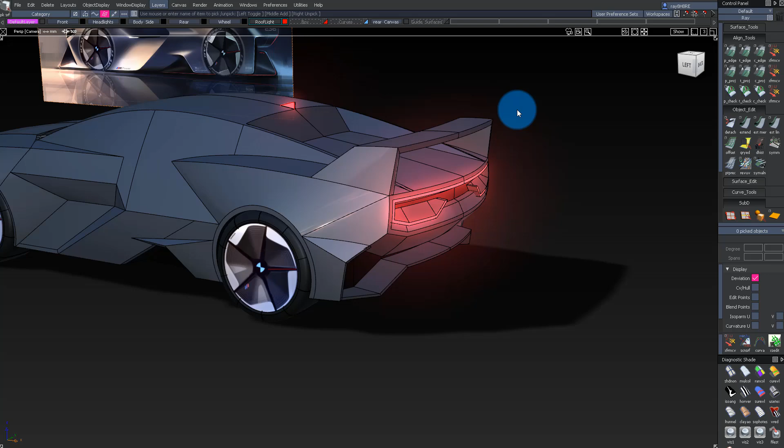Hello and welcome to part 4 where we surface in the rear. Before we get to that, I think this is a good time to step back and see this model on how it looks finally complete in this stage. This is just the first stage.

Now that we could look back on it, we could really start to analyze it and compare it to our sketches and see what went wrong and what went right, and overall if the proportions are good. This is a great time to send this off to Hanbin, and he could do some orthographics on top of that, which he already did. So let me quickly show you guys what he did.

Overall, we got really close. He really enjoyed these proportions, how thick the body is. The really big change, if you notice, is on the wheels. And all we're really doing is we're not making them bigger or anything, we're just moving them up about 30, 40 millimeters.

Obviously for a race car, to have extremely low ground clearance is super normal. So it's very easy, and it's still very believable if we just move all those wheel wells up, and it really balances out this car a lot better.

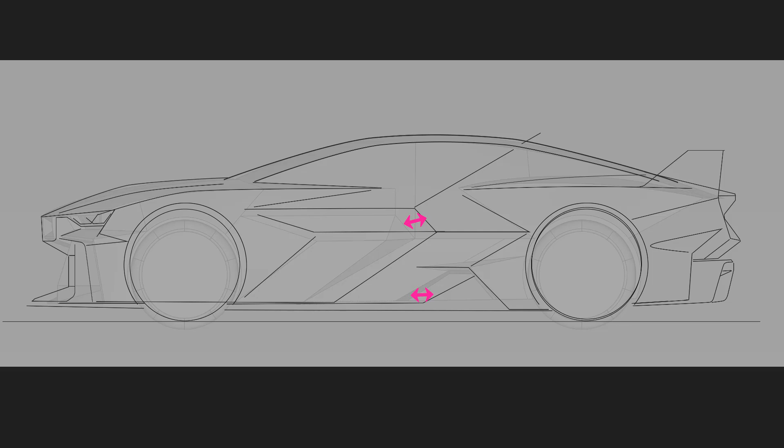And then if we look at all these lines, all of these are just like the curves that I already set up, and he's just refining the proportions. There's a lot of synergy here going on.

He had a certain side profile. This is a different one, but now it's within a package. He got my CAD, and now we could move forward. This is a very quick and great way to accomplish this.

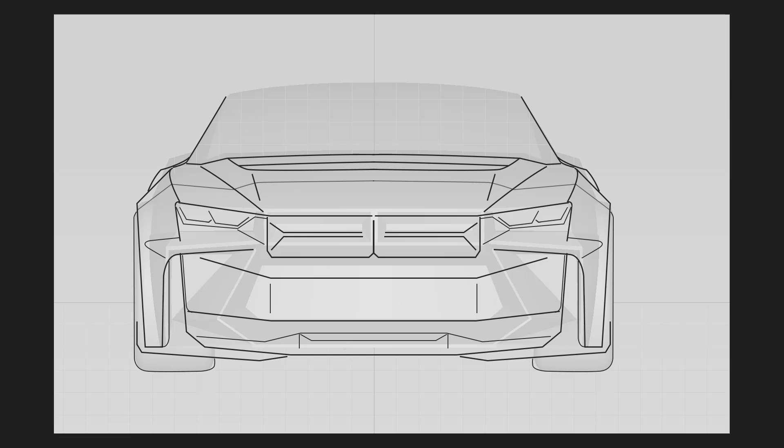And if we look at the front, it's still very good. He wants it a little bit wider, maybe a little more aggressive in the front, the grill a little bit taller, but nothing too crazy. And it's gonna be very easy for me to take my blocked in form and make it into what he wants. So let's remember that this is just the first step.

I actually consider this like the first real anchor. In the first video, I was talking about the anchors in a curve, and then later we talked about anchors as a surface, and now when we're talking about the grand scheme of things, this is like the first anchor. This is the first blocked in form that we can use as a base and really start to refine everything, and all of the relationships between the surfaces.

Proportionally speaking, they're not correct yet, but the relationships between them, like how if we can accomplish them, it's apparent, it's really easy. We could take this form and maybe mill it out, and maybe a clay sculptor can take it and further refine it. Obviously I'm going to refine it later in a more digital workflow.

But actually, I wanted to take this time to show you guys that this is really an extremely valuable skill set to have this blocked in form. Because if I send this to any other modeler, if they receive this and the sketch or the orthos that Hanbin gave me, it's very easy for them to sort of get to the next step.

There's a bigger proportion of CAD modelers who can do that, but to go from zero to this is much more rare. It's very easy, if you get this and someone's like, hey, put a fillet here, do this, refine this line, do whatever. But just having this form in space, that's its own skill set.

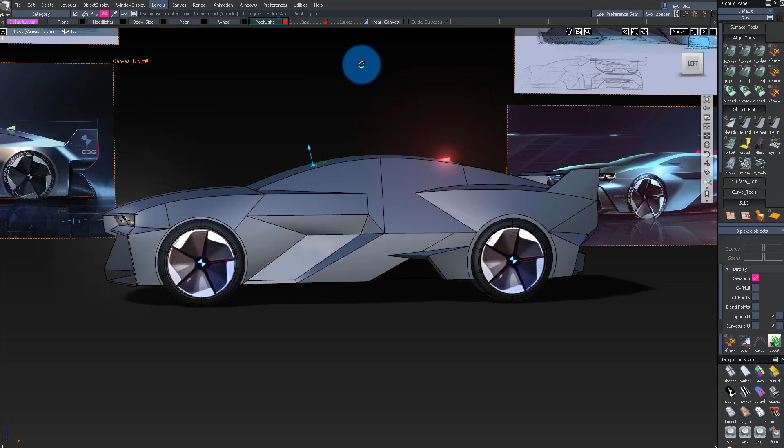All that is more of like the fillets and stuff, that's all technical stuff. But finding the form in space quickly is an extremely valuable skill set, and I always encourage people to practice it. Don't remodel stuff that you see on the road, because you're really just copying something. Try to find something that isn't in 3D yet, maybe some sketches you find online or your own design, and try to get to this point.

Try to practice that skill set, because it's extremely valuable. And also, let's remember, I've been doing this for a very long time, so it takes a very long time to get to this understanding of forms, or analyzing a sketch and being able to do this in a relatively short amount of time. If you do this in one day, they'll be extremely happy for you. But if you take a week, it'll be fine.

Before we do all the resurfacing, which will be the next video, we still gotta surface the rear. So yeah, I hope you guys enjoyed this video, and it's gonna be pretty basic, very much like the front. The side was the hard part, but the back is pretty easy. So let's get to it.

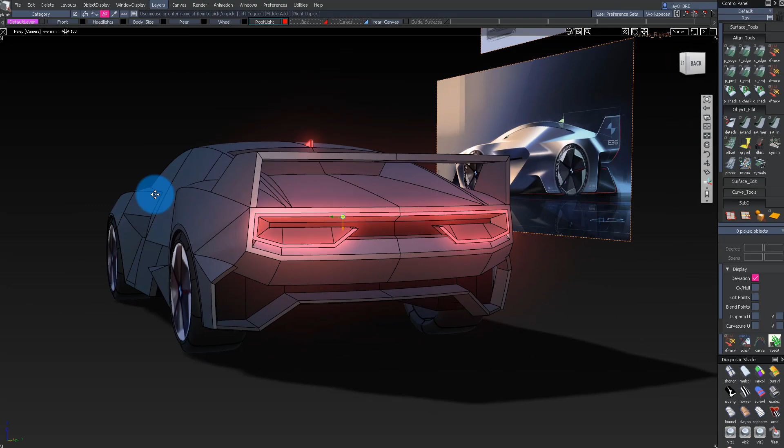Alright, so first we're going to surface this little rear fender. I'm going to grab all these curves in that surface, isolate them, and I want you guys to pay attention on how I use my surfacing tool to readjust my curve network, and the bottom of it, the side that's not connected to the surface, to make everything a lot smoother. I'm basically using the top surface to figure out how that bottom surface is supposed to be.

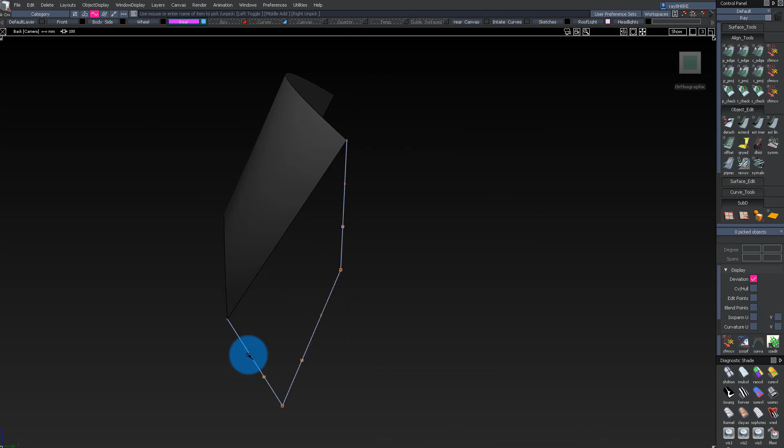Right now I don't know what it's gonna be, so in the beginning I just guess, because I know it's not gonna be flat, so I'm just gonna add a little bit of curvature. And then after that, I'm gonna use my square tool, which is hotkeyed to my number 4 in my preferences, and I'm gonna square up this side.

Then using that same tool, setting it up with curvature, I'm gonna let that tell me where the surface wants to naturally go. First I gotta go into my settings, and on that number 2 side, I gotta change that to curvature, and then on my collinear options, I'm gonna turn them off because I don't need them right now. This kind of shows me that the bottom of the surface is just too far out. You see how it's kind of bending in and then it goes straight? It should sort of naturally go further in.

So the first thing I'm gonna do is just make sure that all my curve network is set up with these new CVs, because the curves, I just made them wherever. But now that I know that's the right position to make that curvature, I'm just gonna snap it to that square. It's really kind of crazy because the curves I used to make it are getting adjusted by the result.

Here I got really close, but I just gotta get that curve and snap it, and then get that bottom CV and snap it. And now using this information, I could kind of tell right on that bottom left corner that it's too far out. So I'm gonna get my curve network and just put it in further inboard.

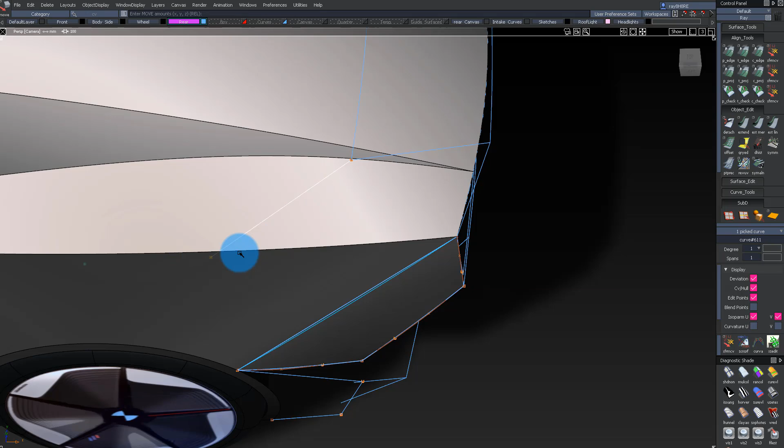I think it's important in this part of the stage to have more emphasis on letting the surfaces do what they naturally want to do versus doing exactly what a design wants to do. Because a lot of times what the surface or geometry wants isn't in line with what the designer is intending. But it's a lot easier to figure that out later when you already have everything blocked in how the geometry wants it blocked in.

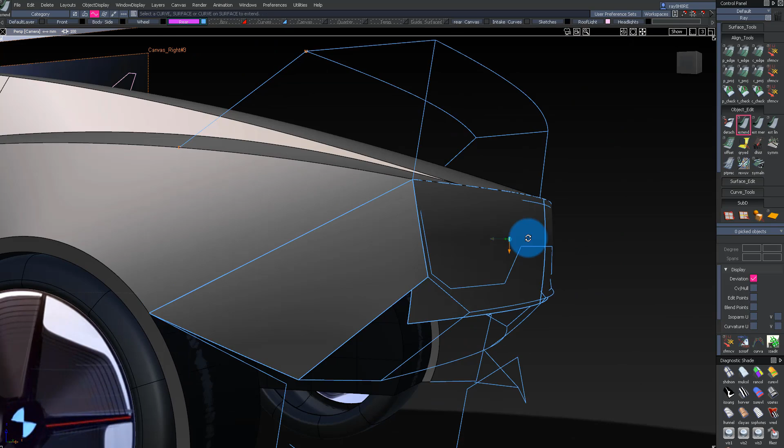For example, this rear surface that I just railed is a fairly simple surfacing condition. I railed it, and now I'm gonna extend this middle curve out to give it more space. And if you notice, that surface isn't really in line with the edge of it. Once I extend that out, we'll see the natural intersection.

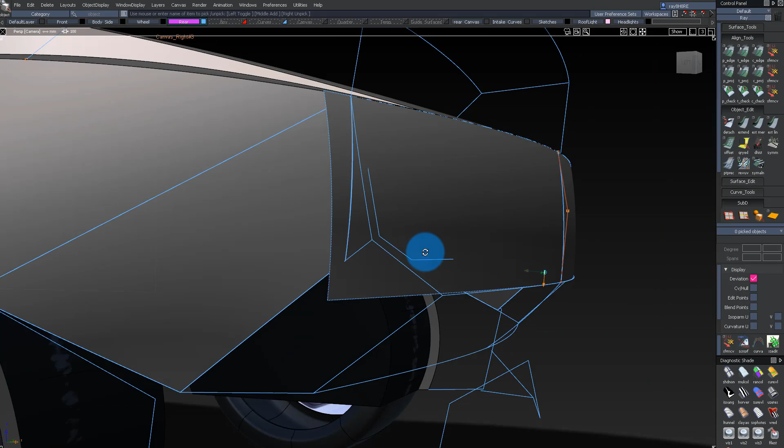Here's where you have to make a decision: should I have that surface twist out to meet this corner, or should I just do a natural intersection? Maybe it's not exactly what the designer wants, but that's the cleanest intersection I can get at this moment. That's the balance you have to figure out on your own—where should you twist stuff, or let the surfaces do what they naturally want to do.

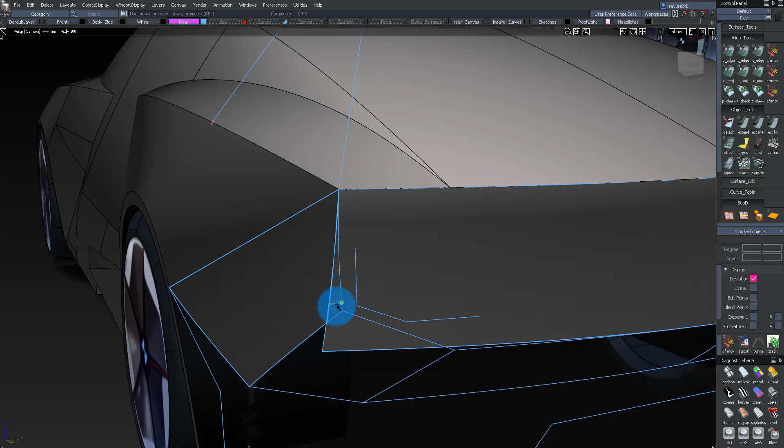If you saw that intersection, especially with the curve network, it does change the angle, and every angle is really important in all the designs. So it's really important to figure out if you're doing surfacing first and then design, or trying to get the design first.

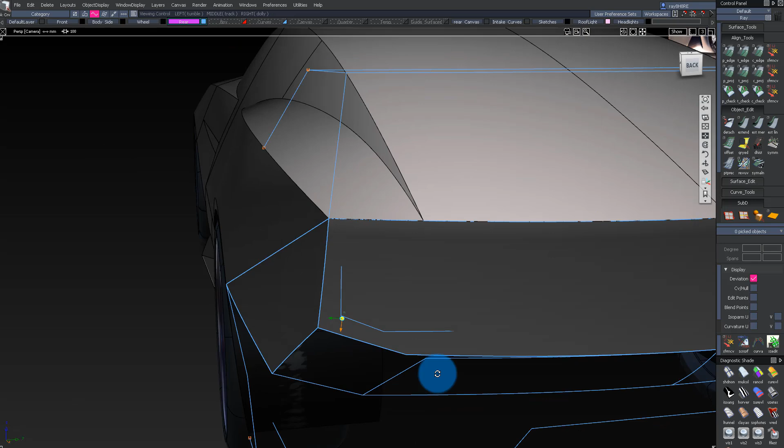In my own workflow, I always try to get the cleanest possible surface. Then after that, if they want something out here, we can twist it—we could do all the twisting later. But while I'm still blocking in this form, I'm just going to let the surfaces dictate their natural intersections and curvature, where they want to land. I hope I'm explaining what's going on in the back of my mind.

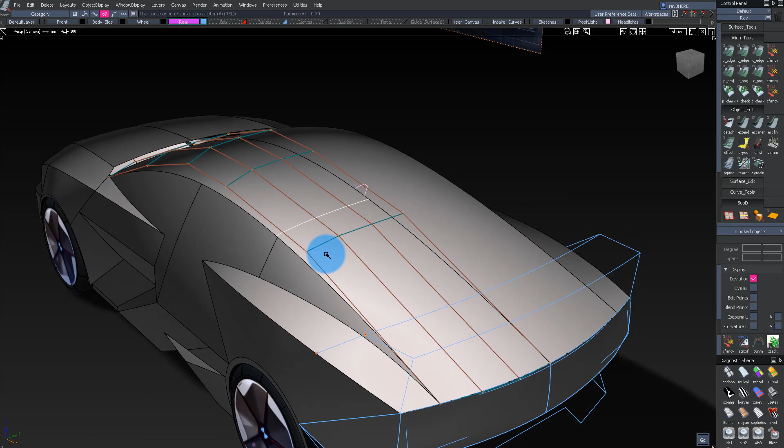So here I'm just going to start blocking in the rear window. If you see in the top left sketch, that window is cut in from the roof, and I'm doing the typical inserting the curve on surface to cut it where I want. Then I'm adding a curve and figuring out the distance, and I'm going to rail that across.

Now that I see it, I'm going to make sure it's parallel. It also has too much curvature in the bottom, so I'm going to add a curve there, project it, and trim-convert it to straighten out that bottom edge. Now that I see it with that window, I can see it's a little too big, especially when you see the sketch—it's a little tiny window in the rear.

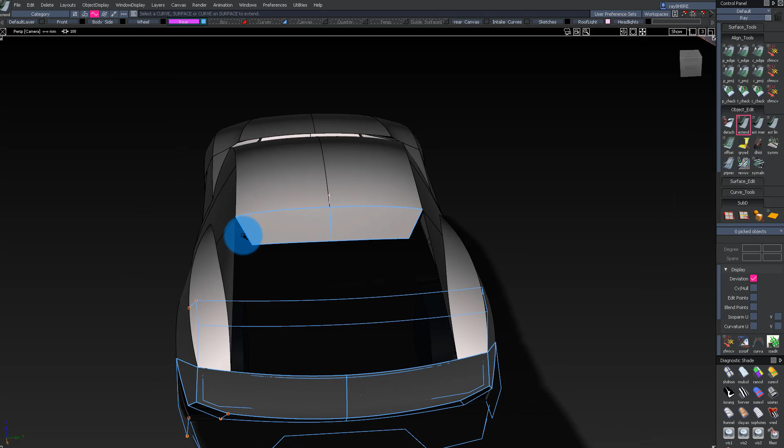From here, I could start adding little curve networks to see where it's at. And right here, I realized I should have cut it just a little further back to make my life a lot easier—now I've got to do everything over again.

Whenever you see places where moving things 10 millimeters can make your surface a lot more connected, it's really, to me, worth it to just rebuild it. That way that corner is completely connected to that other corner.

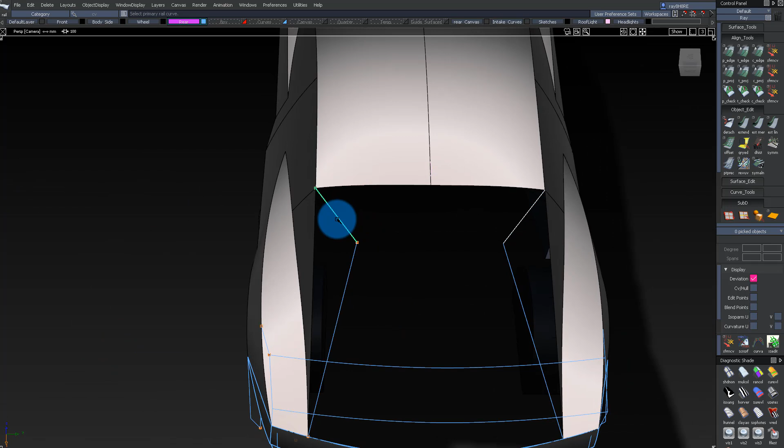Here I'm going to do the same thing, except now that I have that angle, I'm going to surface it backwards, then extend it back to the middle, and use my symmetry plane align to get that there. Then I'm going to rail this and extend it a bit back, project this curve, and there we get a little—I guess these are called louvers, I'm not sure.

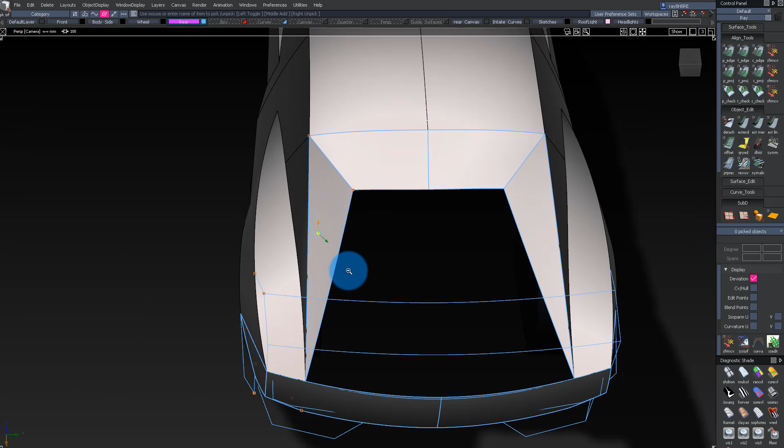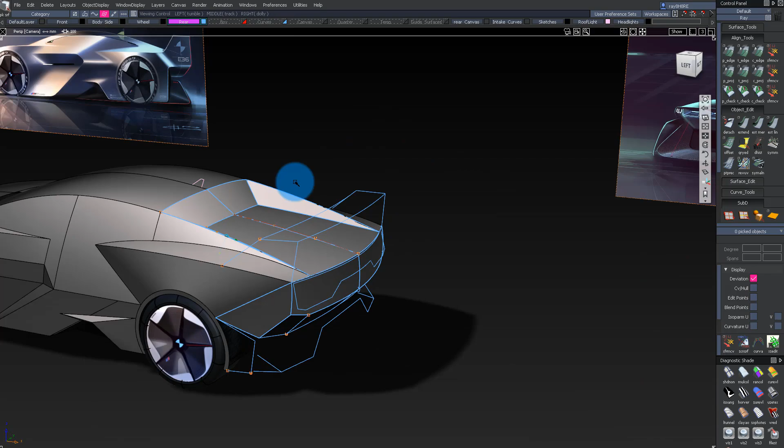Now to fill in this deck, I just add a curve, go to the side view, add a little more degrees, and then more curvature, and surface out that square. As you see here, my position failed—that's because it's a trimmed surface, it needs a little more data to get a perfect positional connection. But it doesn't matter too much when it's in this blocky form—we don't need to look for perfection just yet.

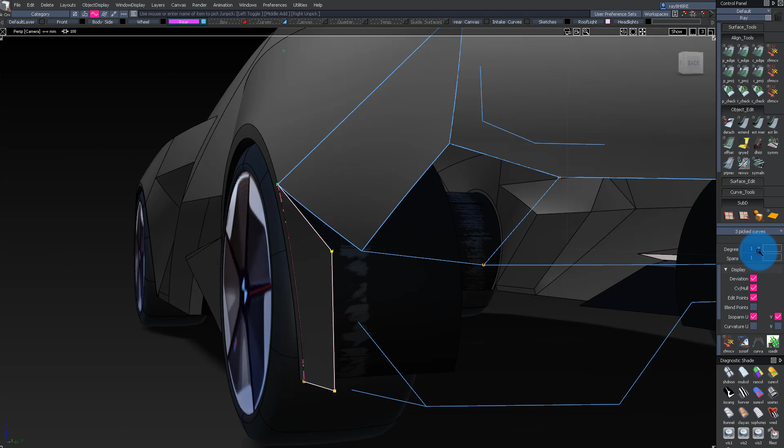In this corner, the bottom corner of the fender, I'm just going to surface this up like a regular little square. All those curves are still straight, completely straight. Let's remember, no curve will ever be completely straight—anytime you use a completely straight curve in the final form, it doesn't really work out. So I'm adding a little curvature, and that makes everything look a lot better.

And here I'm going to use a very similar technique to the front headlights. I'm using the tubular offset tool to make the edges. And as you remember last time I did the same, I'm moving these edges closer in so it doesn't mess with any of the sides. And then I could just trim it.

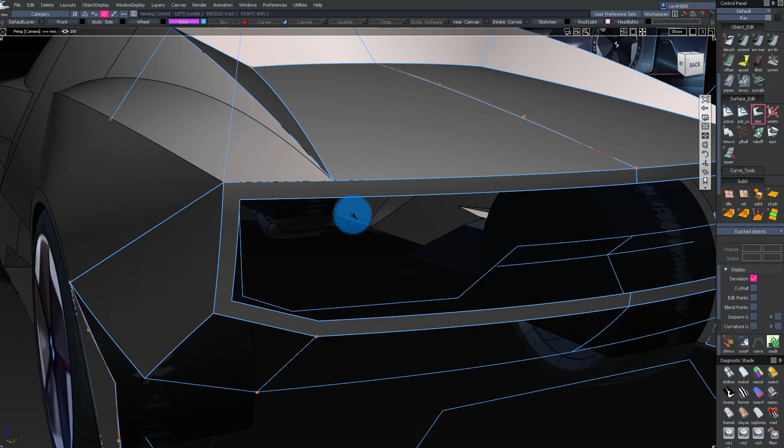Now I have a little sort of border around this rear. Here I'm just trying to figure out what can be my next move, what can I build off of this in terms of the internal structure. I'm looking, and then I see that bottom curve, and I'm like, okay, at least I know that that bottom curve is definitely going to go in like that, and I could use that to sort of go all around the form.

So I'm going to realign it to my new border, and then I'm going to use my rail tool to get it in place. Now, remember, I forgot how I used to clean them post, changing the degrees and stuff. But I'm trying a new method, using my rail tool as the final tool, instead of rebuilding it.

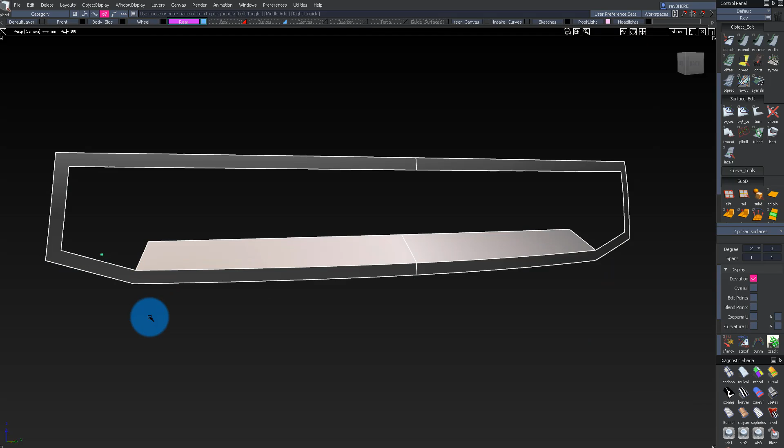So here you'll see it again with all those spans, and I go explicit control, and then I give it like a 3x3 sort of degree, keeping everything as clean as possible. Remember, all my surfaces will try to clean - the minimum amount of degrees you need is the right degrees, the minimum amount of spans is better. See all these spans? Let's get them out of there.

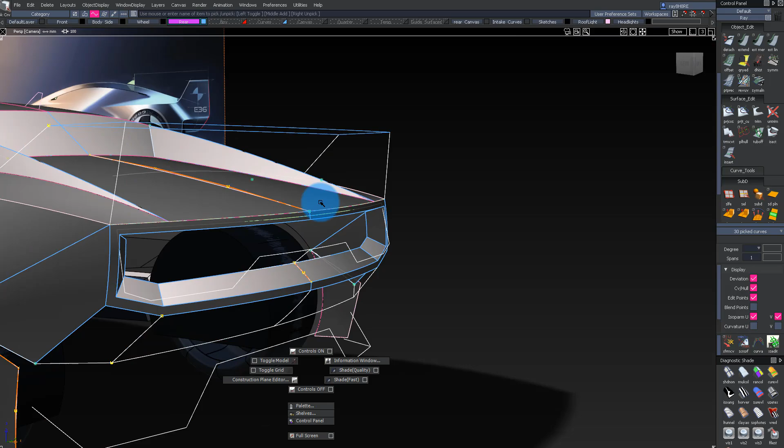And then I'm just doing the same thing, getting a little border around it. After this, I'm just looking for some quick easy wins, and I'm like, okay, I could just quickly surface in the bottom of these volumes. Just get those curves, rail them, and then make sure it's parallel - I always change it to parallel, I might as well make it my default.

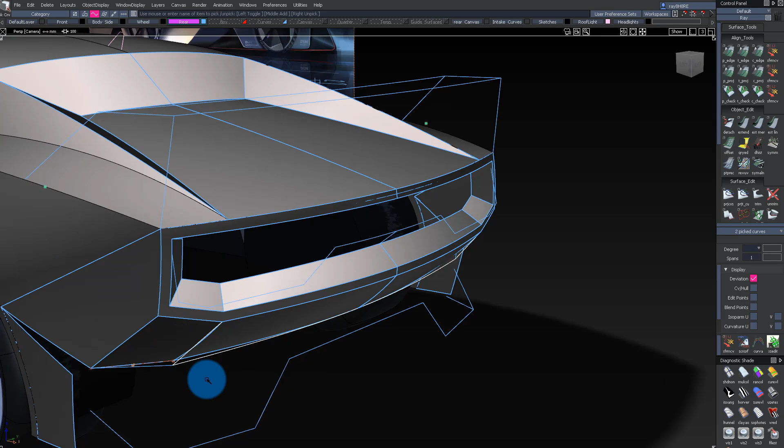Make sure there's curvature in the middle, extend it out, and then use those two as a way to connect them, and then just square it up. Add a little more degrees, add a little more volume, and then use my square tool to get that corner. When you compare this rear to the body side and the front, they're just really easy - if you keep it very blocky like this, it's pretty chill.

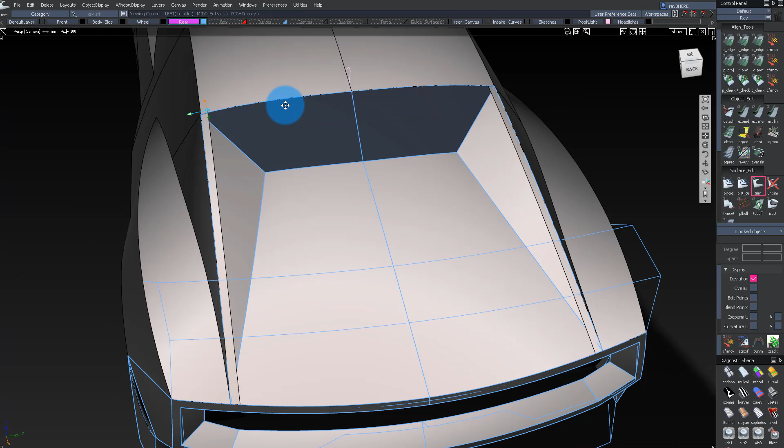And then here I'm analyzing that, and the surfaces are coming to a point, so I'm not really happy with that. So I'm actually going to rebuild it again. I'm going to add a little border here, and this way I have a little more meat right there. And now I have to readjust everything.

It's funny because I'm modeling the same rear, and both times I'm using a completely different method, kind of going from different sides. And then now, since I already have that surface, I'm going to intersect it and trim convert it, as opposed to making it like a square like I did last time.

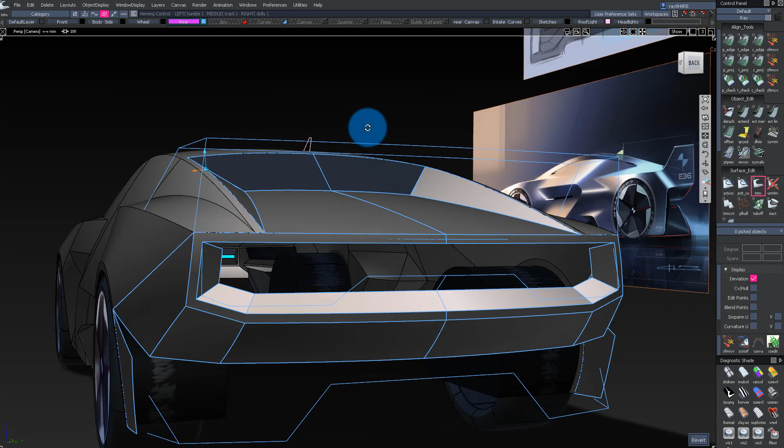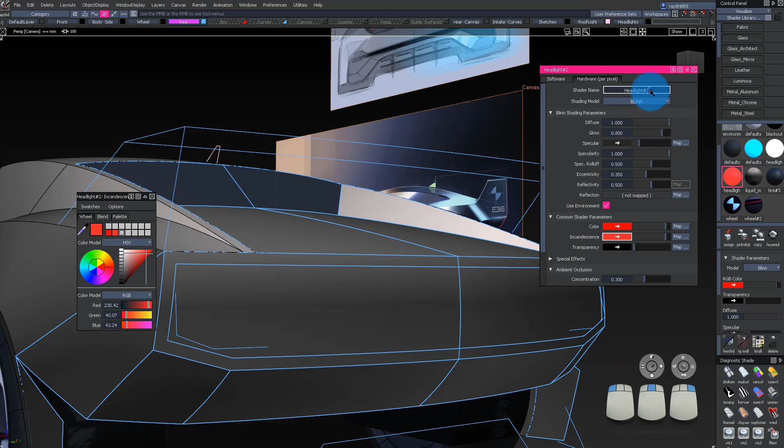And remember, I always keep everything really loose in the sense of how I model - it's not like this is my only method of modeling something, it's only the one that kind of came to my head. If you notice with that rear, I basically remodeled it about 3 different times in this video, which is always important - I always put a bigger emphasis on trying to maximize the speed of your steps.

So that everything you do is really quick, and this way you can do a very free form approach, kind of how I'm doing it. I don't really think much, I guess I don't think about where the tool is at - I just sort of press the button, kind of to test different modeling methods.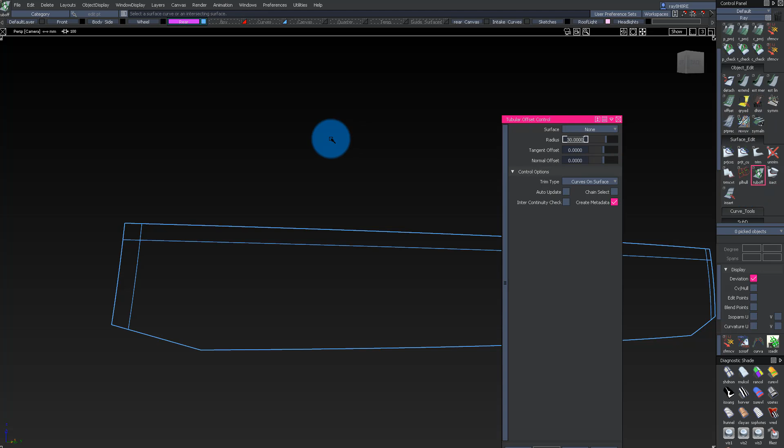And here I'm just doing the rear tail light very much like how I did the front headlight, using my tubular offset tool.

Let me post up the picture of the rear sketch so you can see what I'm trying to do with the rear. This is a good time to notice what I've done and what I'm trying to do, and how I just simplify everything. I'm not trying to solve all the design right now, just trying to get the most basic shape based off this design.

A lot of people, especially in the beginning, try so hard to find the final design right off the get-go. Just remember to block everything in as simple as possible, especially if you're not used to it. This is a very advanced lesson, but if you're starting slower with something like a mouse, just remember that it takes time to understand how to break down a design to its core foundation and build that. Then off that foundation, we add the more intricacies and design elements. There's no way you're able to do that right off the get-go.

I wouldn't be able to do that if I didn't go through this phase, and I wouldn't be able to find the next phase. So I'm just trying to emphasize that when you analyze a design, don't go with all the fancy stuff. Make it as primitive as possible, and once you have a full complete picture, then you can start adding the more intricate design elements or surfacing elements.

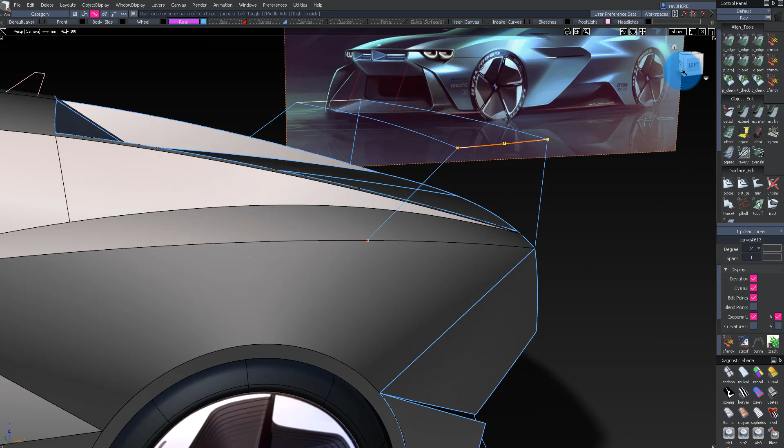The next part is how I made the wing. I kept it very simple because I definitely know that rear, especially proportionally speaking, the wing was really going to be changed a lot, and I just wasn't going to hit it on the first attempt. So I'm doing the most basic sort of surfacing with it, nothing too fancy, nothing too crazy. It's honestly almost just a couple planes, there's really not much to it.

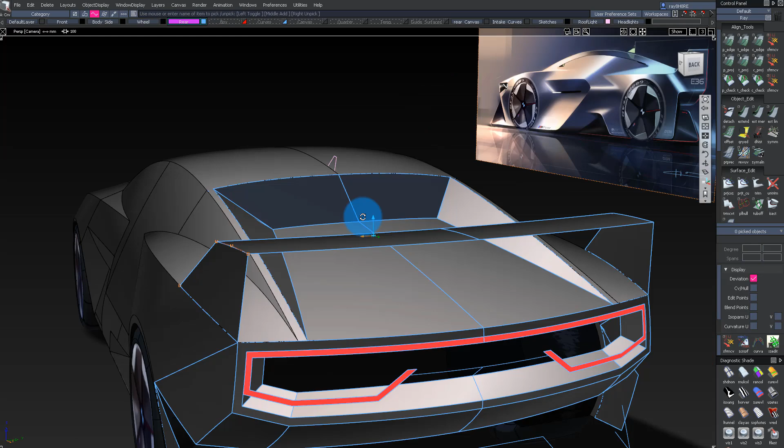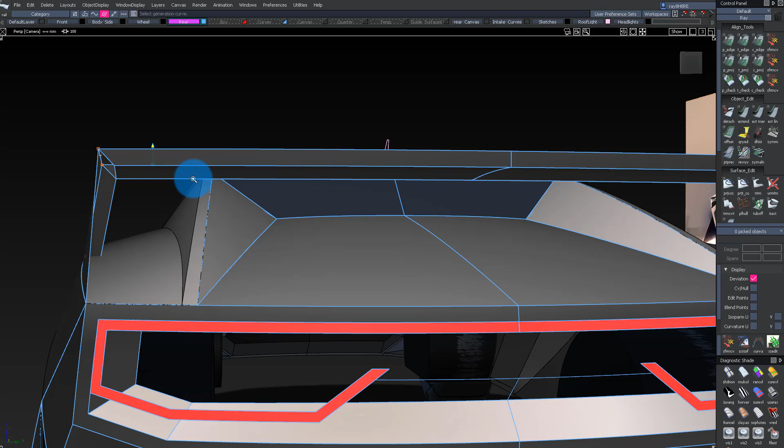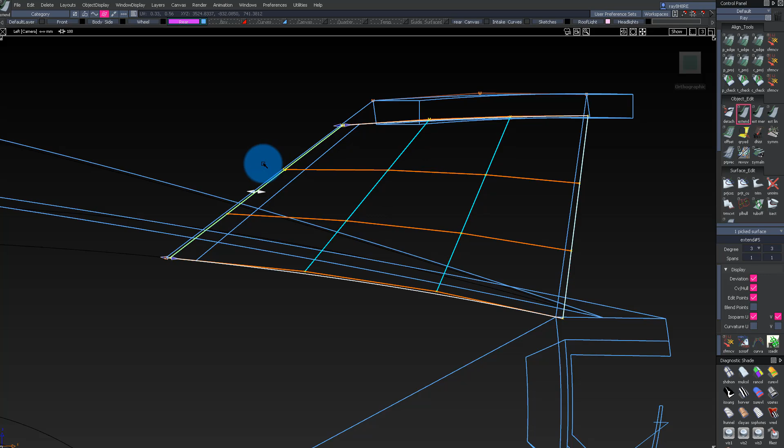Then from that I do an offset of it, or actually, I control copy and paste and push it down, and then from there I skin the other side. Then I use my rail tool to push that surface down, then I rail the other side, and that doesn't give me a good rail. So instead I grab that, copy it, move it in, and move it back. This to me is even looser modeling, just grabbing surfaces, copying them, extending them, nothing too serious because it's still just a blocked in form.

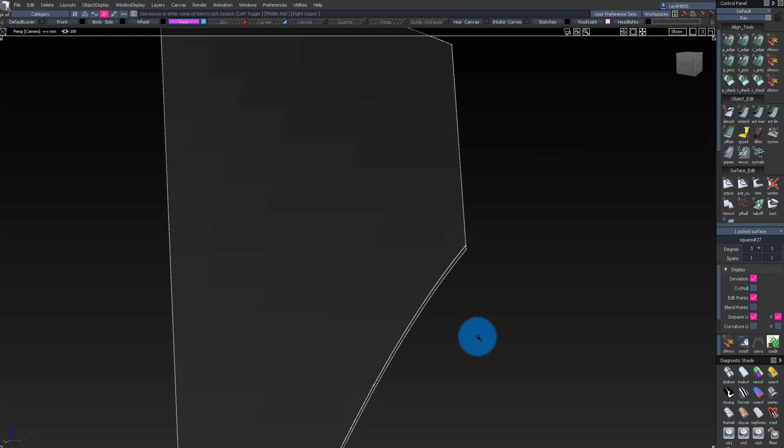When I started doing more design modeling as opposed to technical class A modeling, it was very hard for me to do this sort of loose modeling, where I just grab something, copy it, paste, intersect it, extend it, do all this stuff without really caring much about anything else. That's a valuable skill set to have as a 3D modeler, being able to quickly set something up and not be hypercritical on surface quality or anything, because sometimes the timing just isn't right.

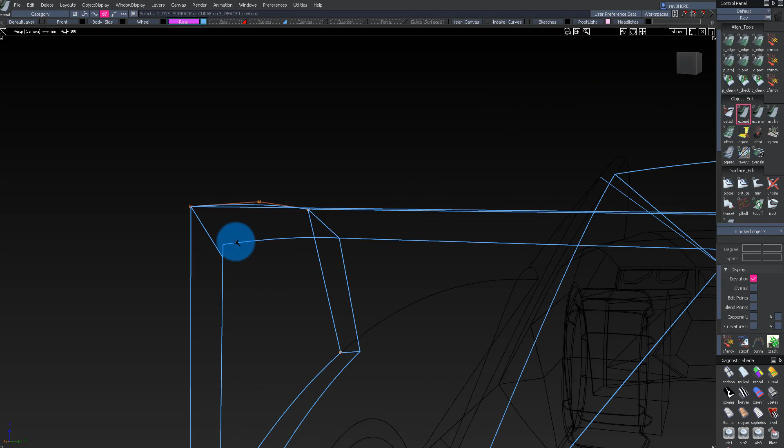Most of the time, the projects, instead of having a relaxed timeline where I have time to surface everything and do everything very perfect, it's under a very harsh deadline, and you just gotta get it done. So you don't really have the luxury to make everything super perfect. A big part of learning to model is learning to model quickly, kind of shitty, but still with the right structure.

From here, I move on to the lower rear fender, and all I'm going to do is add a curve here, then rail it, and this gives me the natural intersection. Then I'm going to add a little more degrees and curvature to the curve, and this way I can see what the natural intersection is between those, and then just intersect them and trim them.

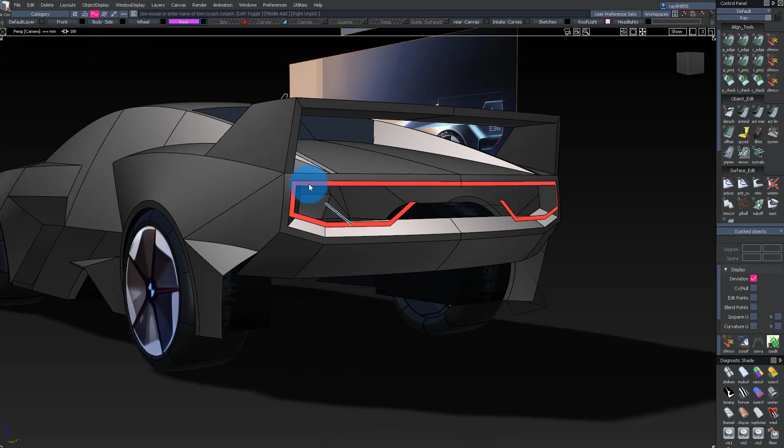And to add thickness, I just put a curve and then I rail it, and then using that same surface, I extend it back to change that angle, and then I rail the next one again. This is something I've done like a million times in most of my videos. I always add thickness like this.

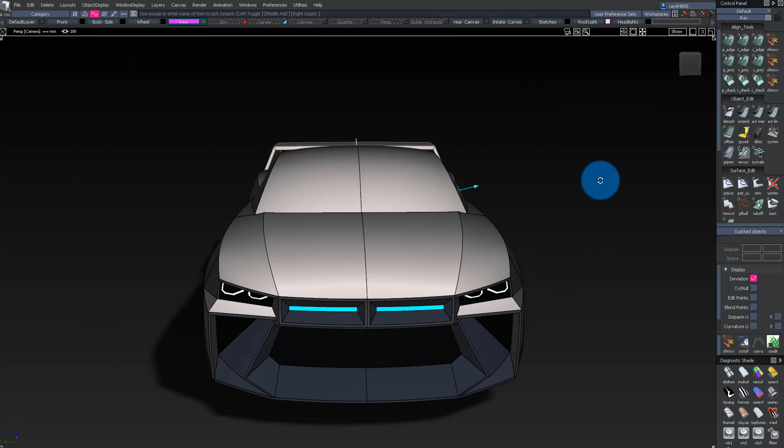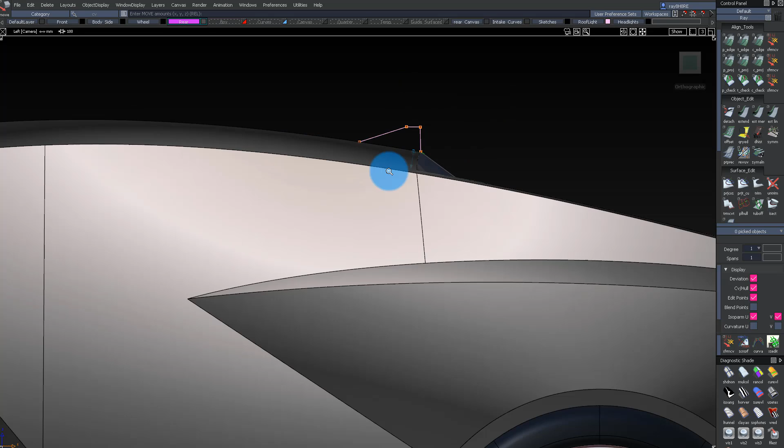Now we're gonna get to the most important part, surfacing this little itty bitty light on the top. A lot of people think it's small and kind of insignificant, but I actually think that in designs, especially little details like this, you really need to get it right from the beginning. Even though it's a tiny thing, it really gives a certain character to a car. So it's really important to find those little design elements and take the time surfacing them, even though they're simple and small, and you could do them towards the end of the project.

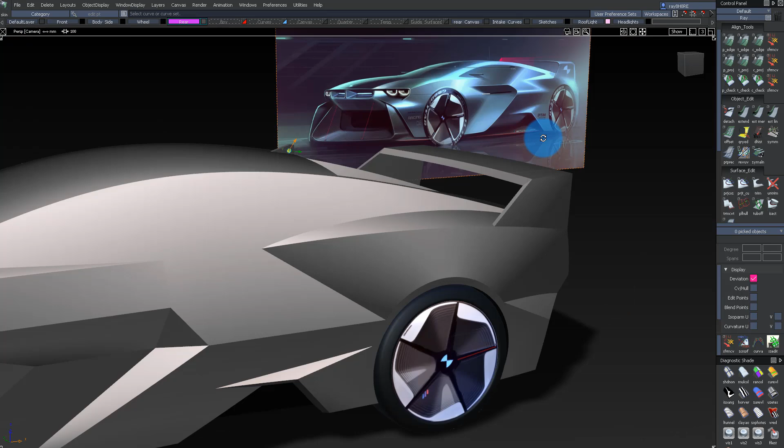It's always nice to have that, and you could start imagining it in this car. It really helps get the proportions right. Even though it's so tiny, it really does change the look of it a lot. It goes to show how talented Hanbin is.

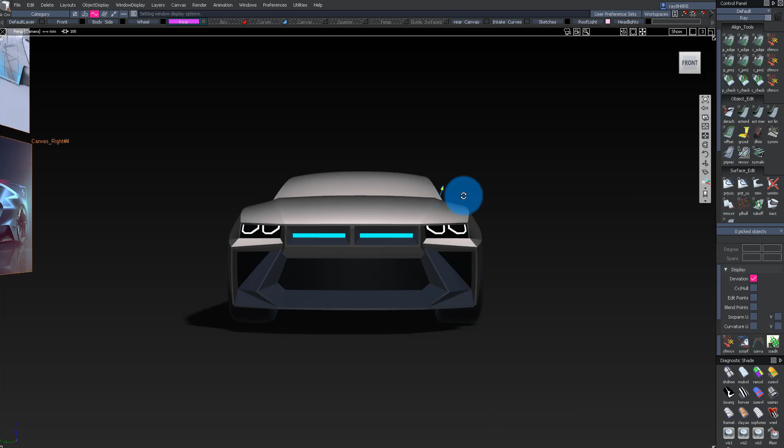Once I get back to the rear, I notice that angle is a little bit too flat, so I'm just gonna delete it and use my rail tool again to start all over. I'm gonna make sure I go into my explicit control and take away that span, so just make it 1 span and 3 degrees. And then here I'm gonna extend it out so it can meet the surface.

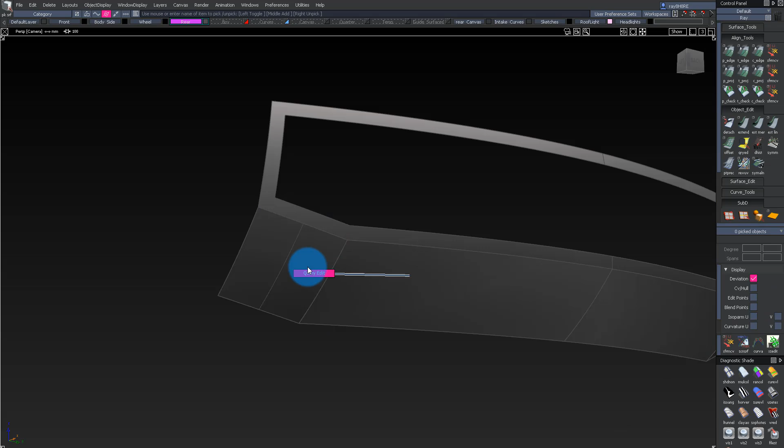I think this is probably a very similar method to what I did last time. I intersect that, extend that surface out first, then extend the trimmed surface, and then do a trim convert to give me that surface.

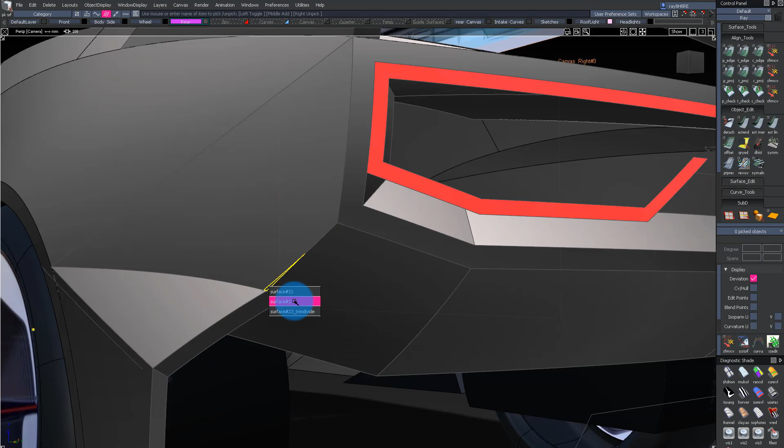Here with this one, since it's already trimmed out, I decided just to trim it without doing the typical trim convert. Then I use my extend tool to move that angle out, so now I have a much more aggressive, upwards angle towards the edges.

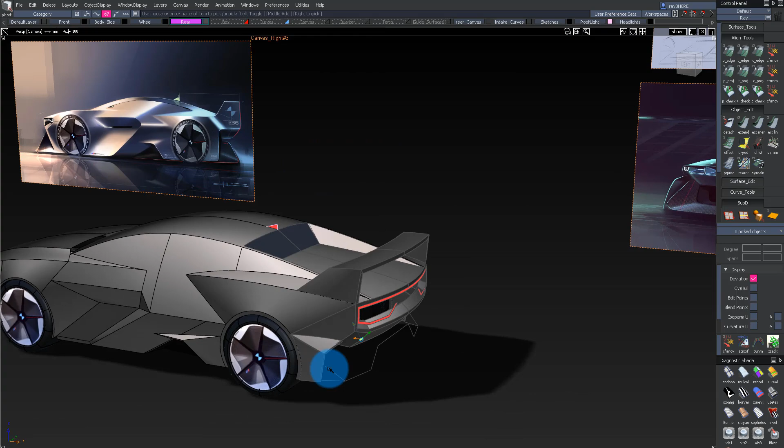From here I go down to the lower rear fascia, and as I'm looking at the curves, I notice it's a little bit too complex. I could simplify it for right now, so I just grab that CV and eliminate those two curves, and then just connect it. That way I can keep it a little simpler, a little easier to figure out.

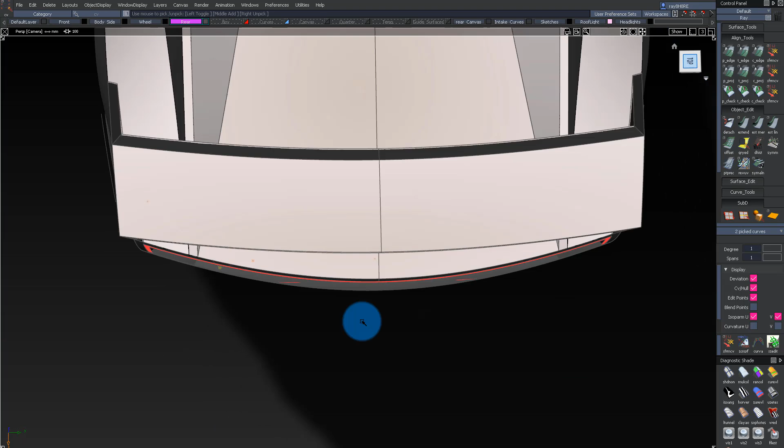Remember to try to use the same edges and curves from your model. So what I'm going to do is duplicate this edge, and then snap it to that new position, and then extend it back. This way that curve is completely matched up in terms of curvature with the top. Now I can focus on just how far forward I'm going to move it, and what the relationships are, just kind of moving everything around.

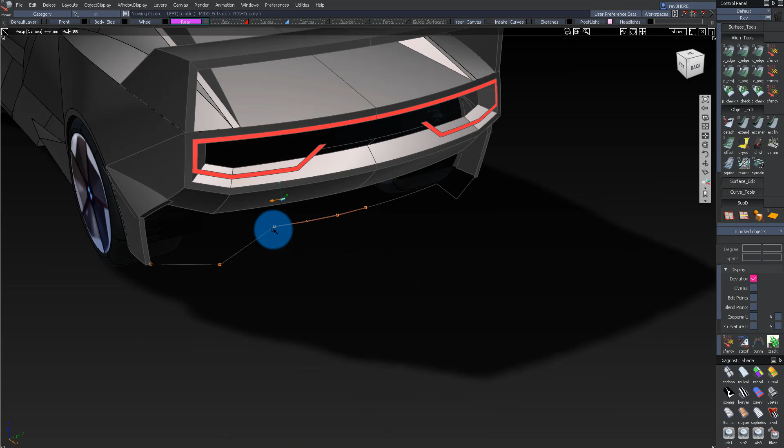As you develop these curve networks, and then develop the surfacing with it, you start to understand the proportions more, and obviously you move back and forth a little bit. So here I'm just trying to figure out what would be the right proportion to use here.

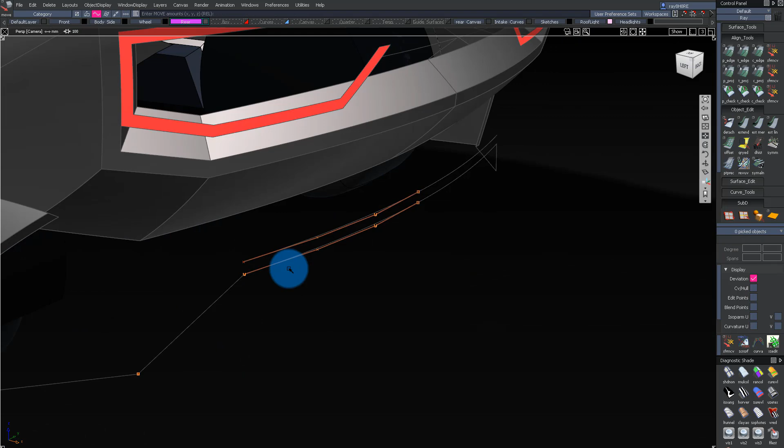I just copy and paste that curve, and then I skin it, and that gives me a nice little thickness. Then I extend that out, and use my rail tool to connect it, extend that back, connect that. And then this is really important.

Look how I changed the angle to make sure that it intersects with the edge. So if I see that, if I keep moving forward, it intersects it. So I'm trying to find the right, correct angle, and that's sort of it right there.

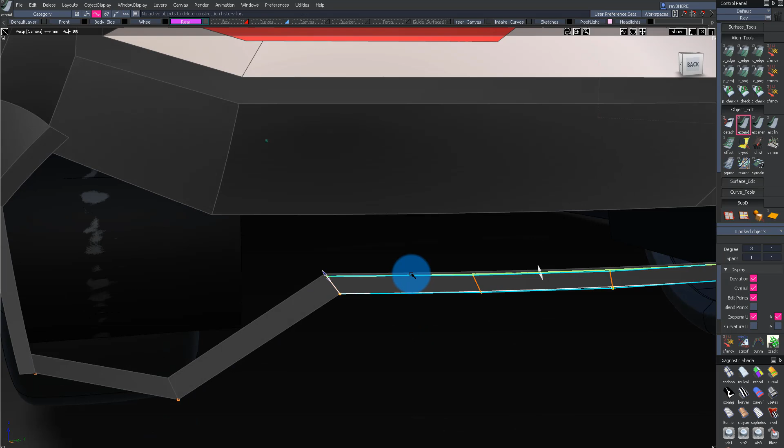But even though that angle is good, it's still a little too thick, so I'm just gonna move all of these back and make them a little thinner. But now I know that all those angles are talking to each other, and if I add fillets on them and all that, it'll be really good.

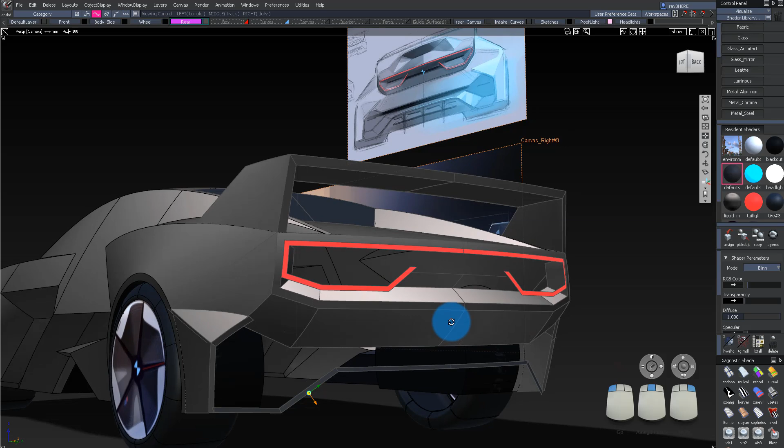Now I can start adding thickness to this lower fascia, so I just add a curve there, and from the side view I find the right thickness, I think. Then I go to explicit control and change it to parallel, not natural, then extend it out, and rail it.

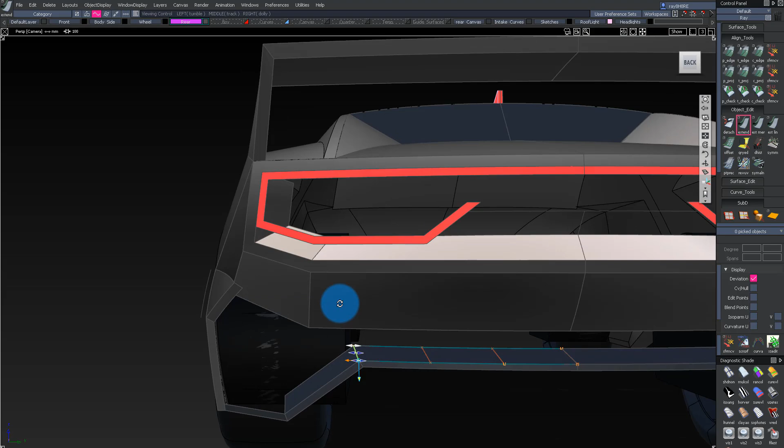Honestly, this is the same thing I did with all the little things, except it's a bigger portion of the design, right? Making these clean rails, extending them back, and railing them again. Even though the angle is right, I still want it to be actually touching, so I use my align tool and make it positional.

And then now I could use that surface to make the edge of this, right? Kind of very similar to what we did in the front.

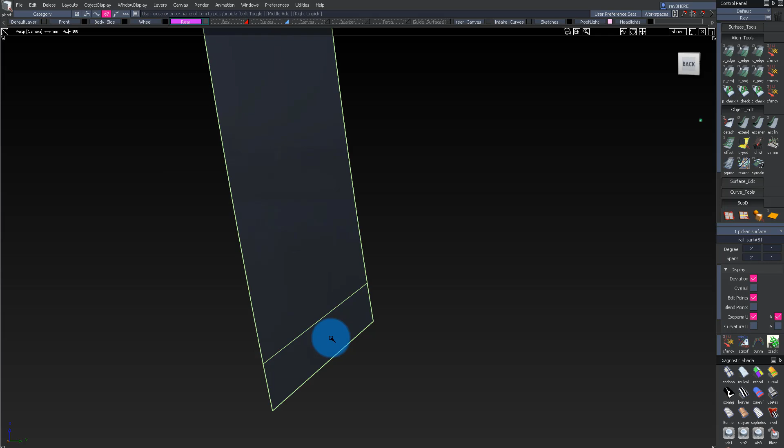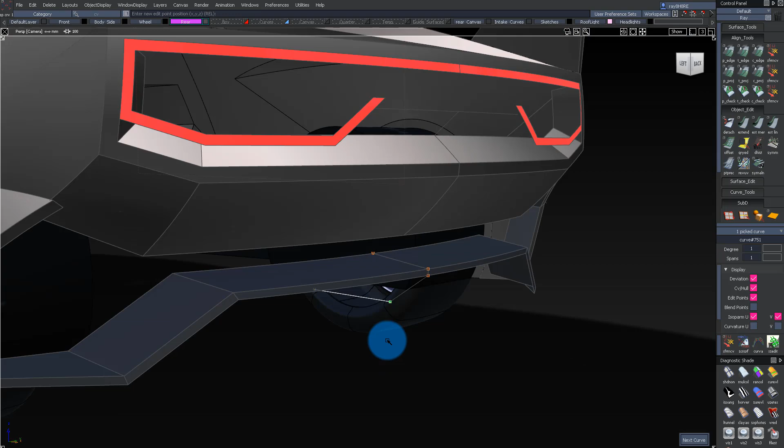Now I move on to the lower aspect of this little rear diffuser, and here I have to figure out if I should add the wings and all that. But there's gonna be such big proportional changes that even though I'd like to add the grills already, it seems a waste of time because I know from the rear it's pretty sure Hanbin is gonna change it a lot.

So instead of adding all the little fins and elements that you see in the sketch, I decided just to do a simple little wing in the bottom.

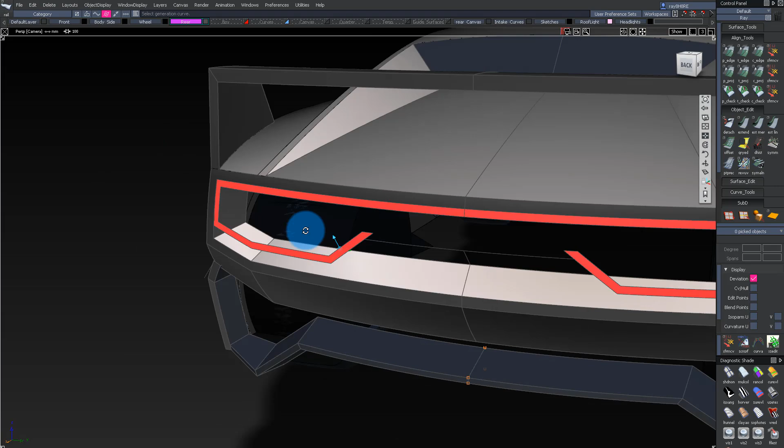Here, for some reason, I wanted to extract the tail light curve in the middle. So I duplicate that curve, trim it again, and extend it back so I could have the exact curve based off that surface. Even though I don't think I use it, I guess I assumed I would later, and that's why I built it.

Now I'm just filling in the inside of this tail light. So I'm adding some curves using my rails, and then extending it back to try to get the right edge, right? And here I'm trying to snap it, but it doesn't make sense.

So I use my detach tool to sort of get around where it's intersecting, and then detach it there, delete the other aspect of it, and that's where I realize, oh, I have to rail it from here to there. So I have to extend it back to clear that back surface, and then rail it.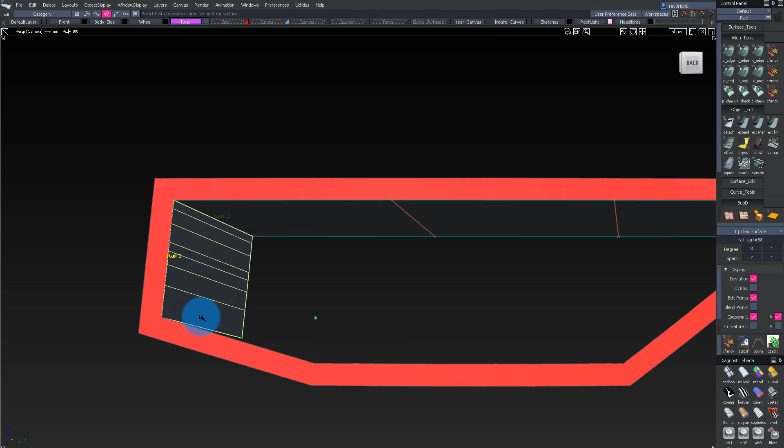So I extend it and then rail it, and go to my explicit control and change that. I really recommend, I know I've said this before, record your workflow. It really makes you see where you're kind of doing extra steps. I know there's a lot of other areas I can improve on, and recording definitely helps.

So here I'm just trying to extend it and find the right form, but it keeps getting twisted, so I have to use the planarize hull tool to clean it up.

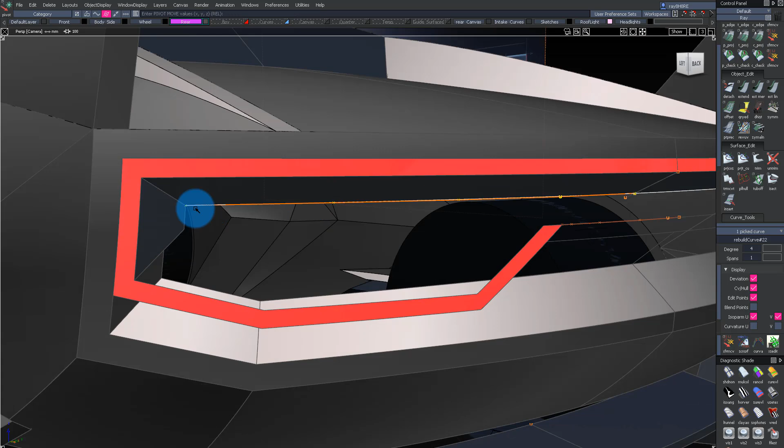So now to build the lower part of this tail light, I'm gonna get that curve I used for the top, and lower it to the bottom, then extend it back so that it's only on the tail light, and then isolate it.

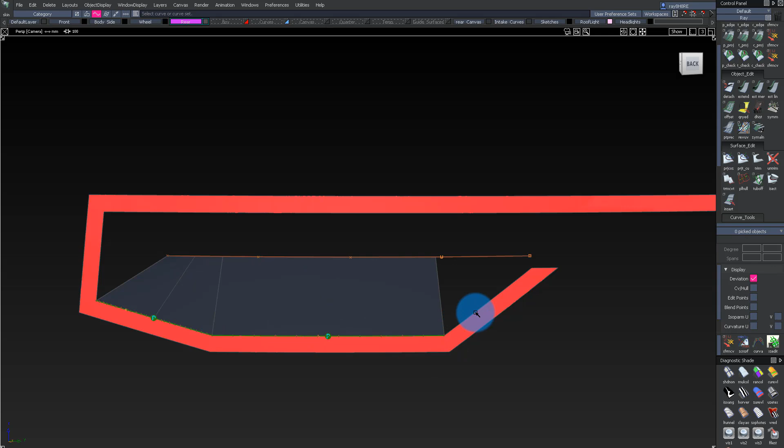Using my skin tool, I click on every corner, make sure one side is on default, and the ends so that the side is connect ends. Now this gives me a quick way to surface this little tail light. Even though I'm not a fan of the twisting and all that, I'm still just keeping everything very loose.

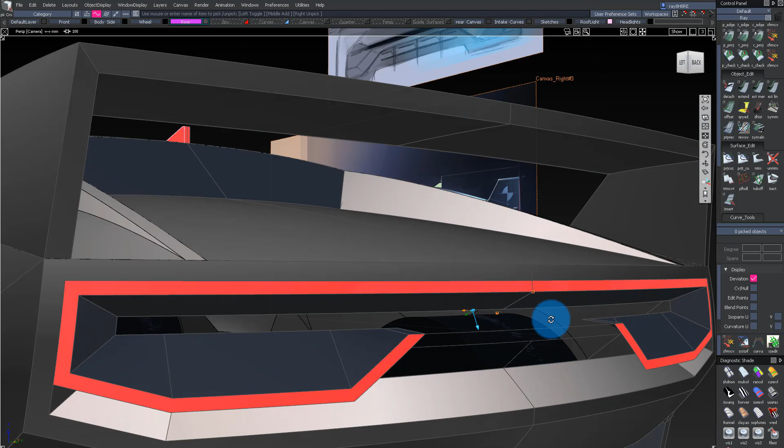Now I extend this bottom surface back so I could try to figure out how to close it. It actually takes me some time to scratch my head and figure out how to close this little opening up, because I did everything a little quicker than usual. So it kind of nipped me in the butt a little bit. But I know that if I just slowly start closing it up, I could figure it out. Every time you add another surface, it helps you find the next step. It's always a bit difficult to figure that out.

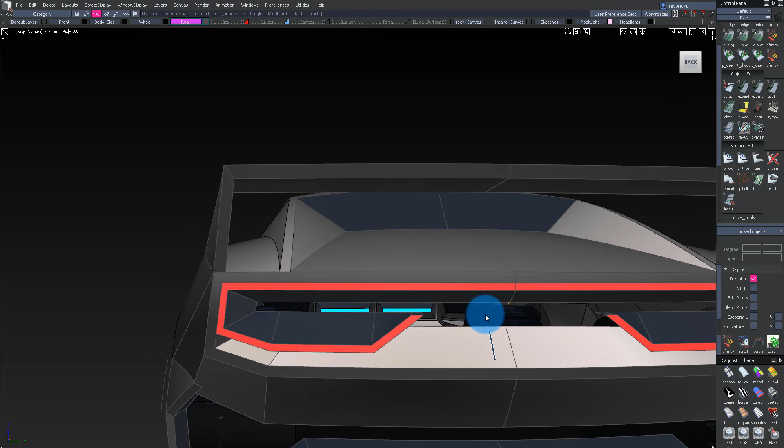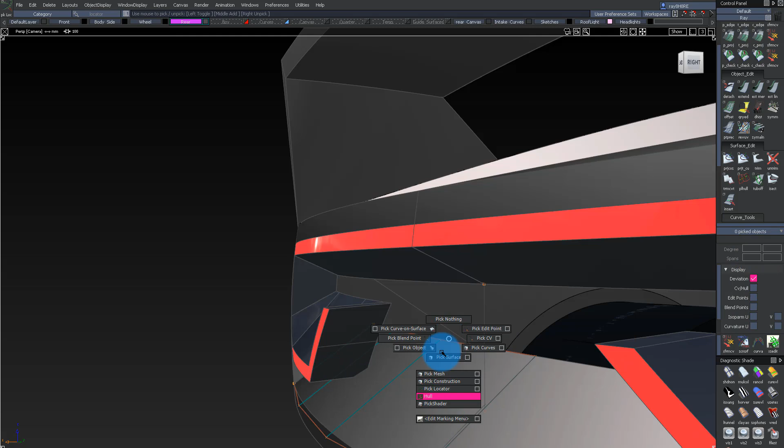Here I'm just doing some quick rails to see how they relate to that bottom surface, and I'm like, okay, they're not really even intersecting. So what happens if I lower the degree, grab that edge, and push it forward, just to see if I could intersect it. I'm like, okay, what if I connect it to the edge right there? It's all really just me trying to figure it out.

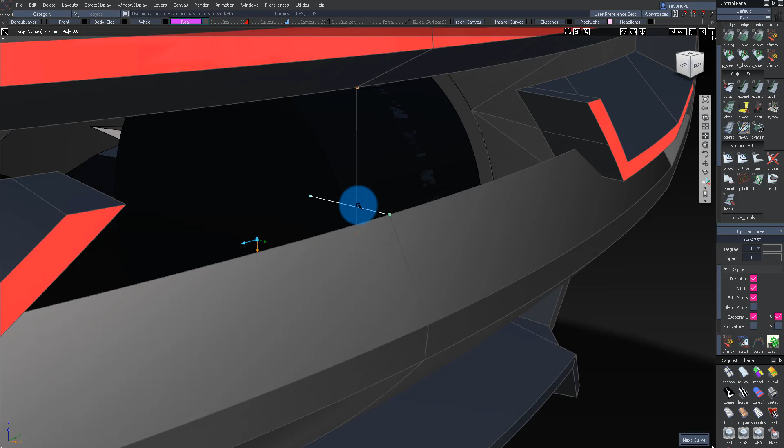Then from far away, I notice it looks a little weird, so I'm like, never mind, that didn't work, and I just extend it back. Then I'm like, maybe if we add a shelf there, that's going to be the right call. So I add a curve, extend these out, connect them to add a little bit of an angle, and then I just rail it, and rail the top of it.

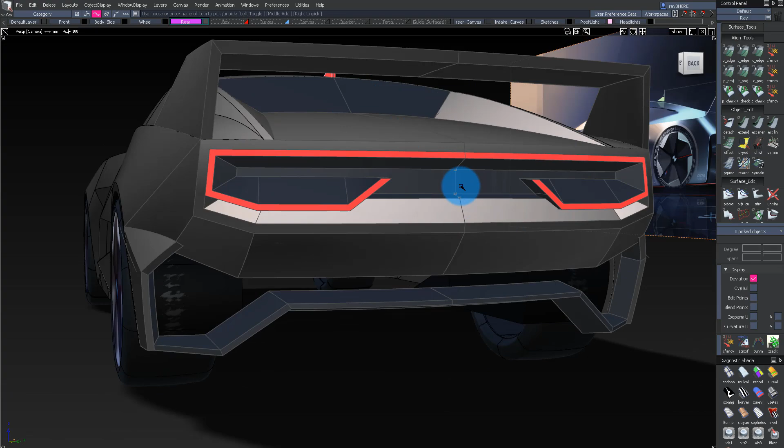Now we're getting a little closer to a full, complete form, because we can see what's going on. It's really, once you start blocking everything in and everything starts closing up, it starts to make a lot more sense. You can see where you could move stuff around to make it look more correct, or even just leave it like that. If you see here, it's basically done - we're getting a lot closer to the final form.

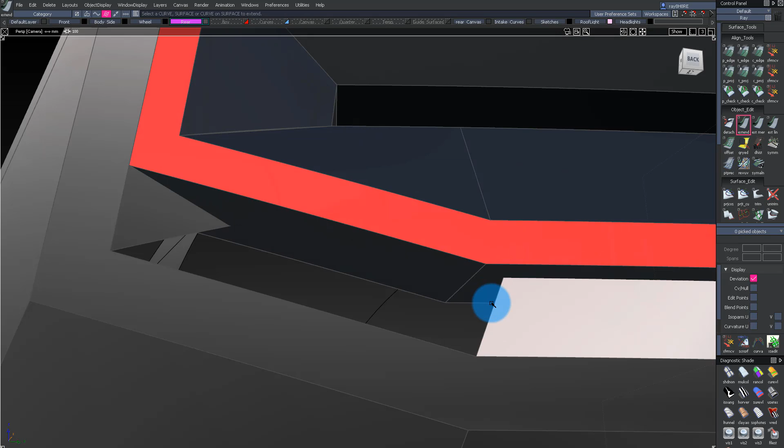All that's really left is maybe closing up some of the bottom, just surfacing those in. Here I just realized I kind of messed up those angles, so I'm going to extend those out to hit that corner. Remember I talked about making surfaces sort of talk to each other wherever you can. So here I just extend it out, then intersect, trim, convert, and now that bottom is a little more closed up.

After this, all I do is just surface that rear by railing some curves, just to block out some surface there, and that to me would be considered the end of the first stage. After this, I'll show you guys how to add that glowing shader.

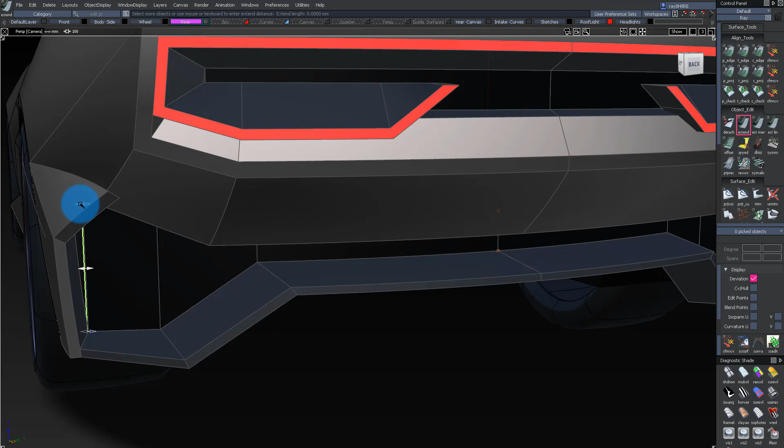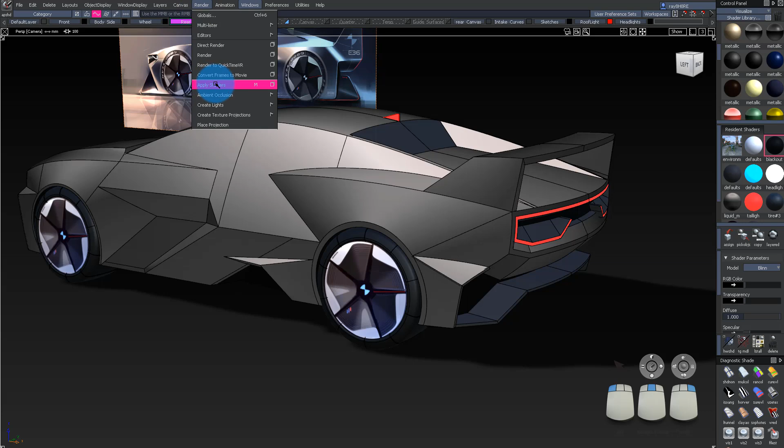So first we got to go into our hardware shade, then make sure that your shader glow is selected. Then we're going to go into our material editor, remember it's the assign shader to start the tool. Then go into our right mouse button, click on open shader editor, and click on whatever you want to make glow. If you see there's a glow menu, it's right under ambient occlusion. When you turn that on, it makes everything really nice and glowy. So that's a very cool and easy way to make your file stand out a bit, when you're reviewing it with the boss.

After I add a little more glow to the rest of the materials, this kind of concludes this video. So I hope you guys enjoyed it. Thanks for watching. And oh, the paint is, I think, one of the black metallic paints that are already in our shader library.

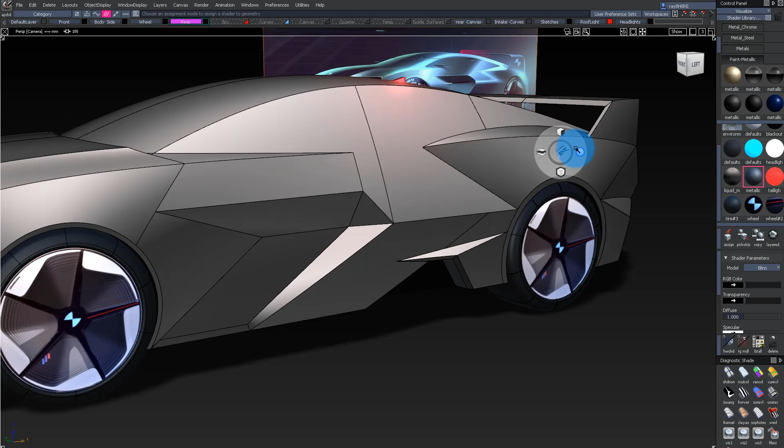I felt like I wanted to change it up a little bit, just because we've been looking at this shader all this time. So it's the third dark metallic shader. I just apply it, and that's the car you guys were seeing in the beginning, nice and done. All right, so I'll see you guys in a couple weeks when I resurface all this with the new design elements.